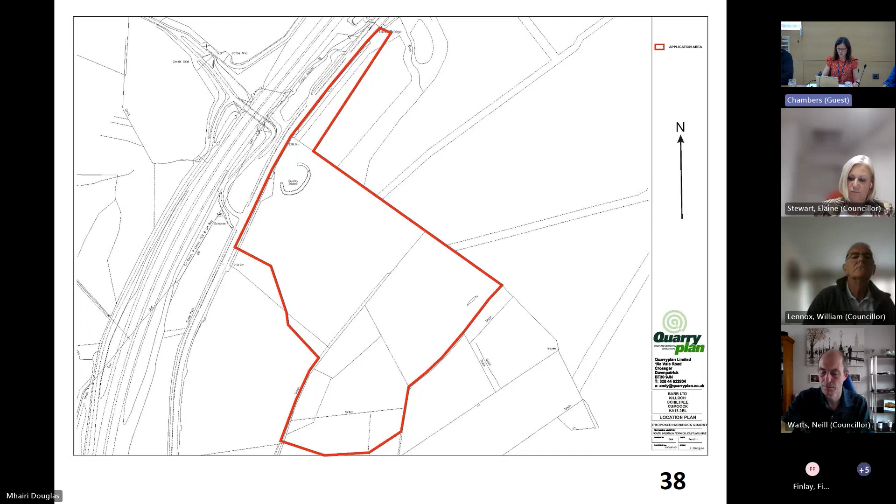This is the third phase, which is currently being worked at the moment. The final reserves of this phase are currently being worked, and they are being extracted from the southwestern corner of the site.

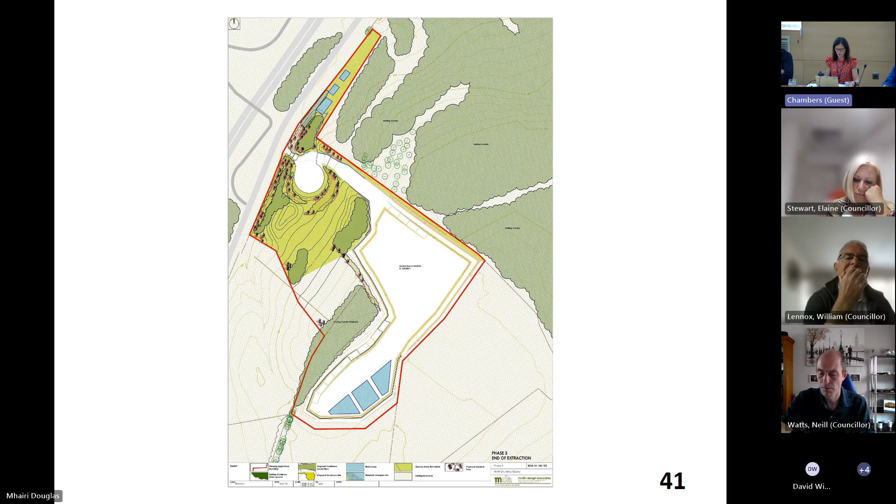So this application is to vary condition 1 primarily. That's the main change to it, is to vary condition 1 of the 2017 planning permission, and seeks to add a 4th phase to the approved phasing plan to extend the quarry to the south, to the northwest, and deepen the floor. This would result in the removal of a coniferous plantation.

In compensation for this, a new woodland would be planted adjacent to the extended extractive area, and this would also include deciduous planting. Overburden from the extension would be placed next to the existing area of overburden from the quarry.

As explained in the report, the mineral reserves are nearing exhaustion around 7 years into the 16-year consented lifetime of the quarry. The addition of phase 4 will allow for an estimated 4 to 5 years of production.

The report considers matters of amenity impacts, including noise, dust, lighting and vibration, along with impacts on biodiversity, ecology, private water supplies and landscape and visual effects.

It's important to note that only the proposed extension and deepening can be considered in those respects, and the impacts of the existing quarry cannot be revisited at this time. No unacceptable additional effects on the matters considered are predicted.

The reapplication of conditions relating to noise and dust will be sufficient mitigation for the extended quarry. With regard to vibration from blasting, condition 21 requires blasting to take place only between 10 AM and 6 PM Monday to Friday. Condition 22 requires blasting to be within acceptable levels at properties outwith the application site. The proposed condition 24 requires blasting to be restricted to no more than once every 2 weeks.

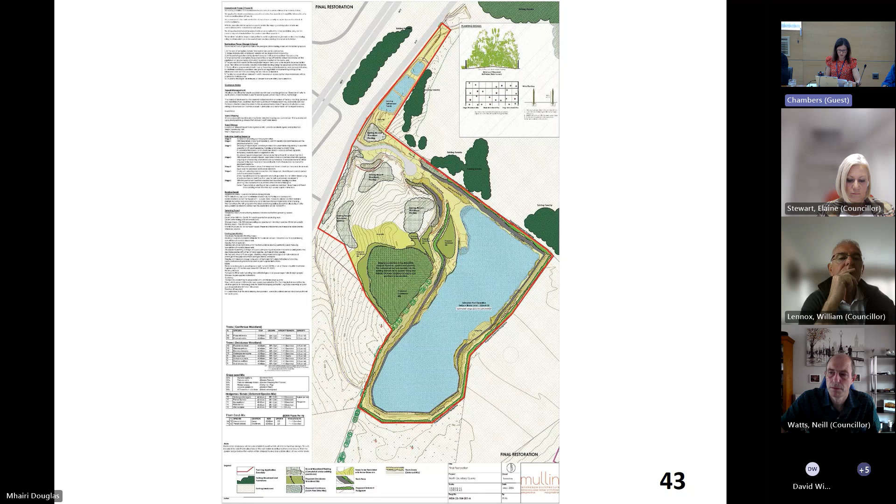The proposals include enhanced biodiversity and safety measures to prevent access to the water body, in the form of fencing and deterrent-type shrubs. Shallower margins are proposed around the edges to prevent sudden deep drop-offs if access is gained, particularly to the northern part of the water body.

The restoration bond has been reviewed and amended for the amended restoration proposals, and has been agreed as noted in the report at paragraph 38.

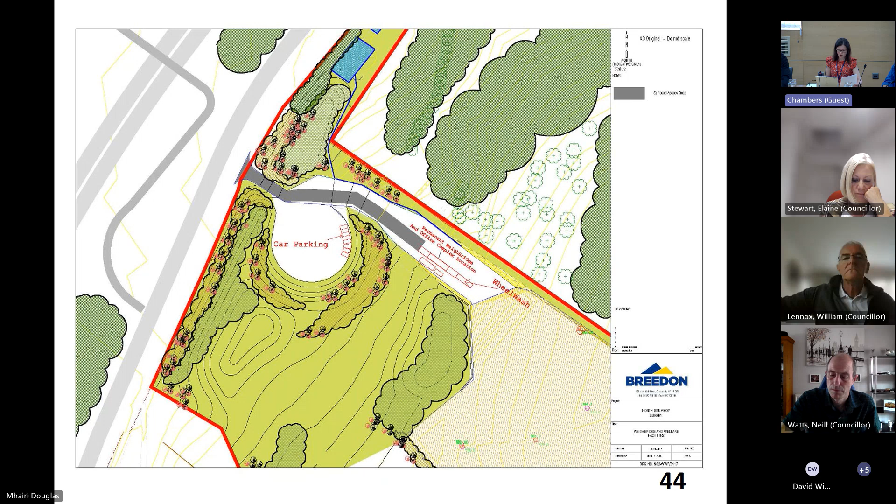This slide shows the existing car parking area along with the site cabins, wheel wash area and the weighbridge, which will all remain in place.

This is a useful aerial drone view looking roughly south. You can see the motorway and the A77 in the background. This was taken in March 2024 with the remaining mineral reserve visible to the south of the site, which has been further depleted since.

The extension would be into the area of conifers visible on the right-hand side of the quarry. You can also see the group of houses at North Drumboy and Marymead in the background—those are the closest dwelling houses.

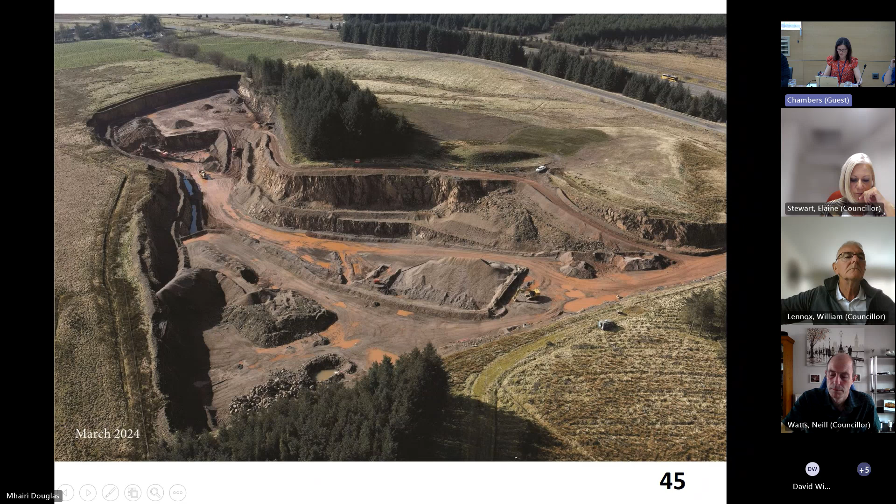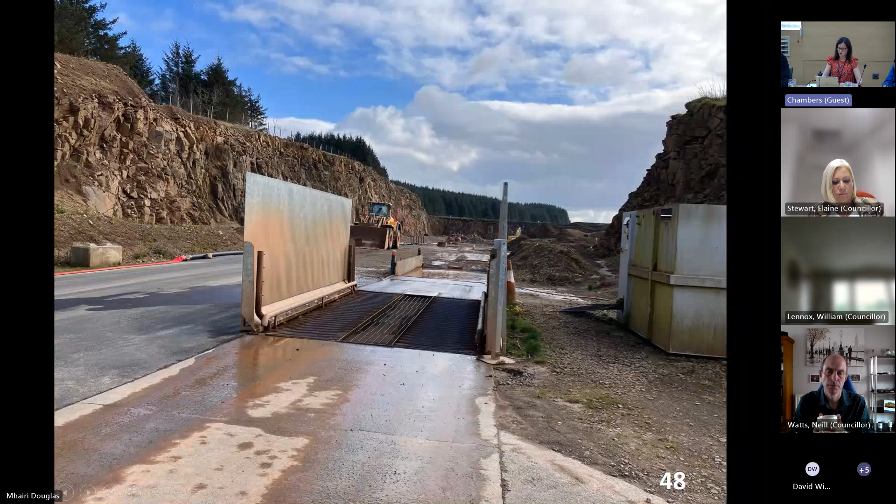This is the existing car parking area and access to the quarry, along with the wheel wash, the weighbridge, and site cabins.

This is looking into the final reserves to the south of the site and the area for the extension to the right-hand side where the conifers are.

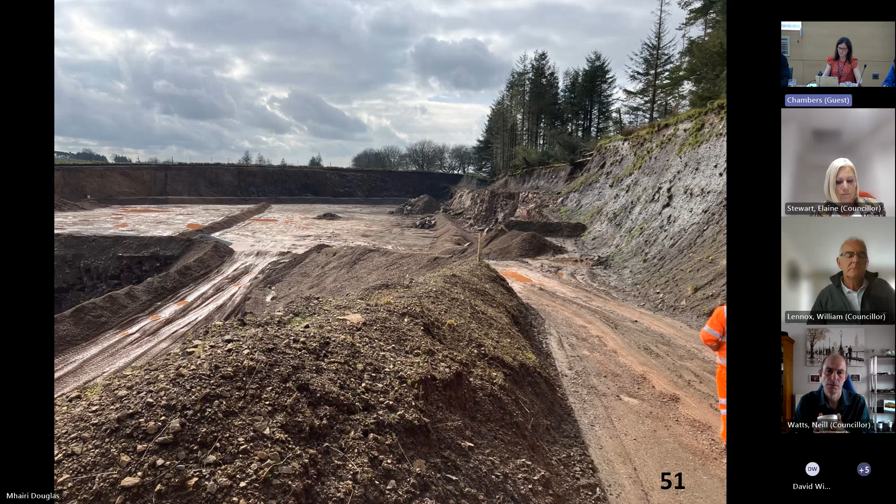Again, looking towards the extended area, which is the area of conifers that have been subject to a bit of wind blow.

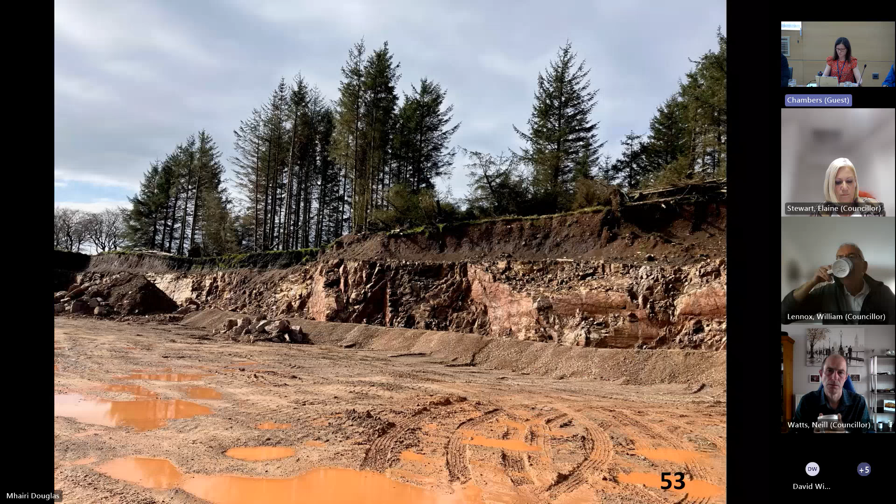Panning around more to the north, and looking from the other side into the extended area—the boundary of the extractive area would be roughly where the post and wire fence is.

Looking back in the other direction, and looking towards the area of overburden that's there at present, which has been planted.

To conclude, the application is recommended for approval, subject to the conditions attached and following the conclusion of a modified Section 75 obligation. Thank you.

Would you like to come forward again? Is that okay? Unless the mic's not working, innit? Oh, I'm sorry, the mics aren't working in the back row. I've just been informed we're having technical issues.

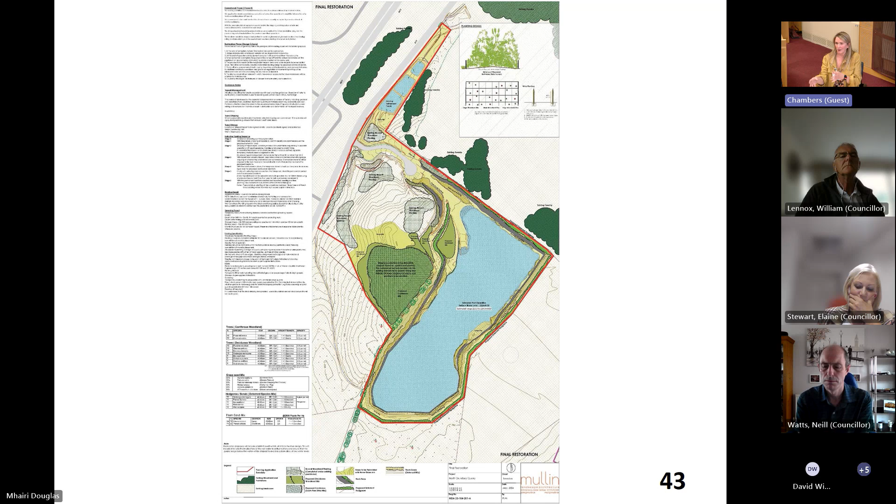Slightly, but it's not a case — we, the three families, and there are children as well in the house, at Norton, a family house that you didn't address. You didn't actually get any information about this planning application. It's not just a case of water. We need water for the toilet, for washing, for everything. It's not just a case of potting a couple of bottled waters. It would be quite an operation, as you'll agree, to provide three full houses with water, potentially for a few months, until a proper supply was established.

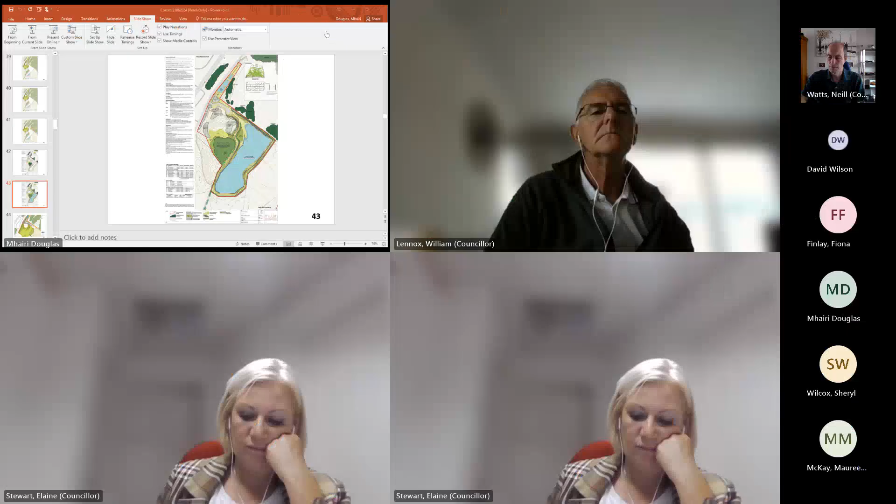So yes, I'm reassured in a way. You're talking about all these things, but again, that's your job to do that, to be reassuring. However, we were quite shocked when we noticed that our water level had dropped over the last 10 years, because that's the last time we had our well serviced. So it was a shock — that's the first time in 70 years of the well being there that there was a deficit in the water.

It's been addressed with the new pipe just now, but it is always a concern. So yes and no, I suppose. It's very interesting to hear it, but again, your job is to propose that for the applicant. So I'm still a bit concerned. And when I speak to the expert I spoke to, he said quite rightly so, you should be concerned, because in the past there has been other properties affected.

So not really, I'm sorry, I'm not. And I'm not really assured by all these lovely things about the vibrations. I can tell you, if I'm standing outside my house, when that goes off, it's bang, and the whole ground shakes. All your cutlery, everything shakes.

And I do appreciate they've got a job to do, but the initial planning, we thought that the three neighbours all thought it was going to be over within a certain time, and now this is so disappointing. It could potentially be more. So, again, it is the worry.

And we had a short disruption to water supply for a few days to get a pipe fixed. It was awful. You can't flush your toilet, you can't take a drink at the tap. It's so natural to go and turn the taps on, but you can't do that. It was actually an outflow pipe that was disrupted and upset the whole thing. Once that was fixed, great, you forget about it. But even a day or so without water is bad enough, and this would be a long time.

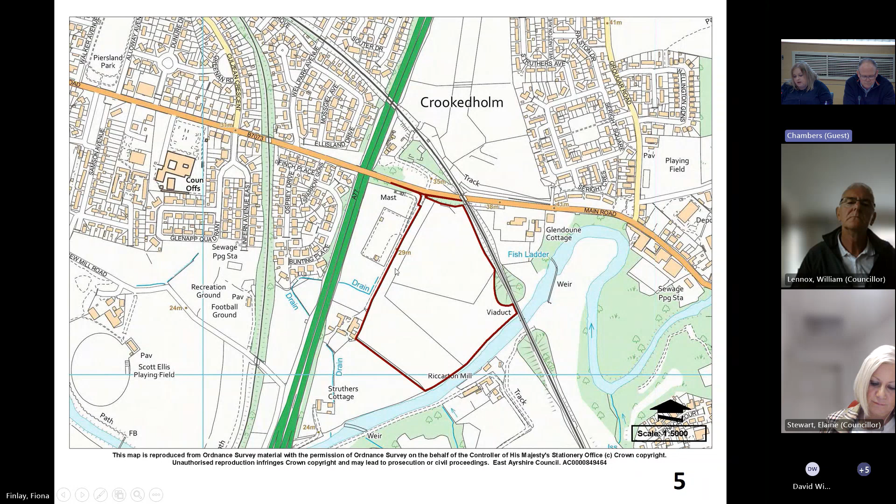If you can turn to your screens, members, I'll run through some slides, and Craig is going to run through some site photographs he took as case officer. The first slide shows the application site in relation to London Road, the B7073. You can see the council offices where we are just now, just along the road from the site. You can also see the railway line along the right-hand side of the site, and the A77, and the river along the southern part of the site with references to properties round about.

We now have the application site as detailed on the applicant's plans. We have London Road at the very top of the site, to the north. As you come in, there is the access lane that takes you down to the Struthers Kennels property, and there is an industrial yard to the left-hand side of the slide. At the very top, you'll see the access road that takes you into the application site, so the applicant is not intending to use the current access road. That takes you into a car park in the north area.

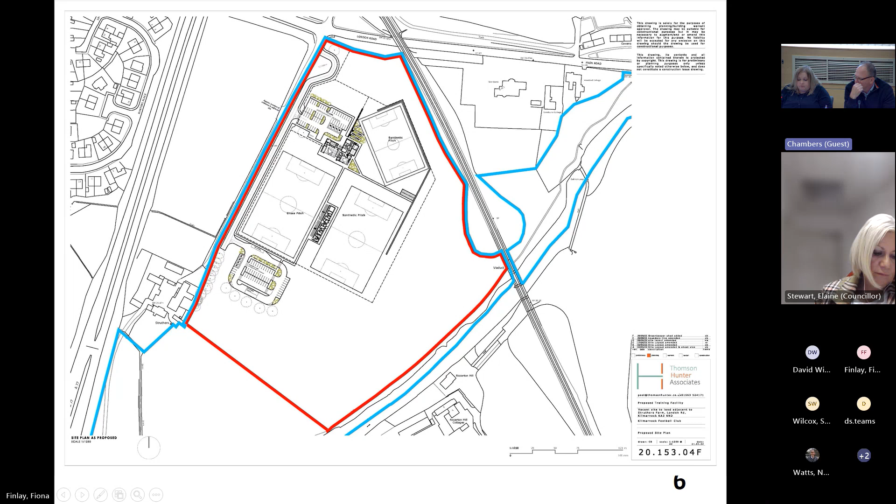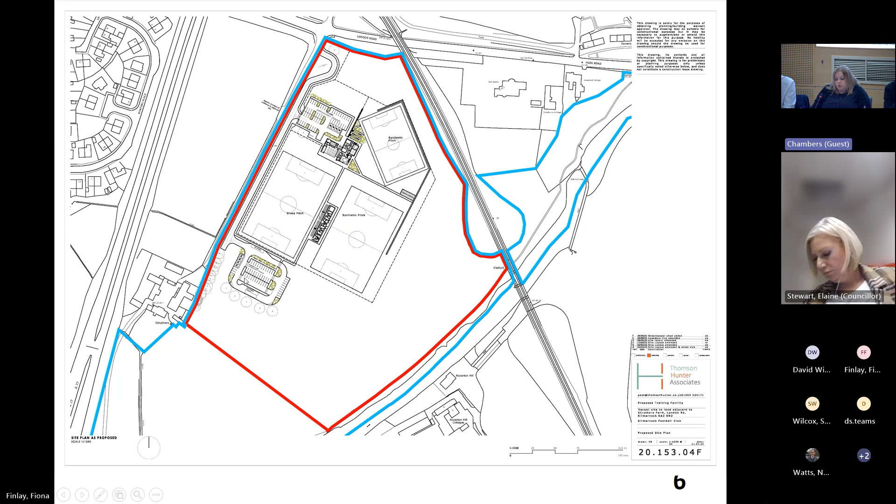To the right of that, we have a 9-a-side pitch. I'll show some visuals in a minute that give more context, but at the moment we have the 9-a-side pitch here. We have the training facility building with facilities inside such as changing facilities, canteen facilities, office facilities, meeting rooms and so on. We have the two full-size pitches down here with a stand in between, which focuses its attention onto this pitch. This little building is the greenkeeper shed, referenced in the report. Down to the southern part of the site, there is a further overflow car park also referred to in the report.

Just in a little bit more detail, members, you can see a bit closer in the car parking space at the north, the training facility building, the pitches, the stand and the southern car park there. These are just the architectural details. I do have some visual images which may give you better context in a minute or two, but these are just the plans that have come in for the training facility.

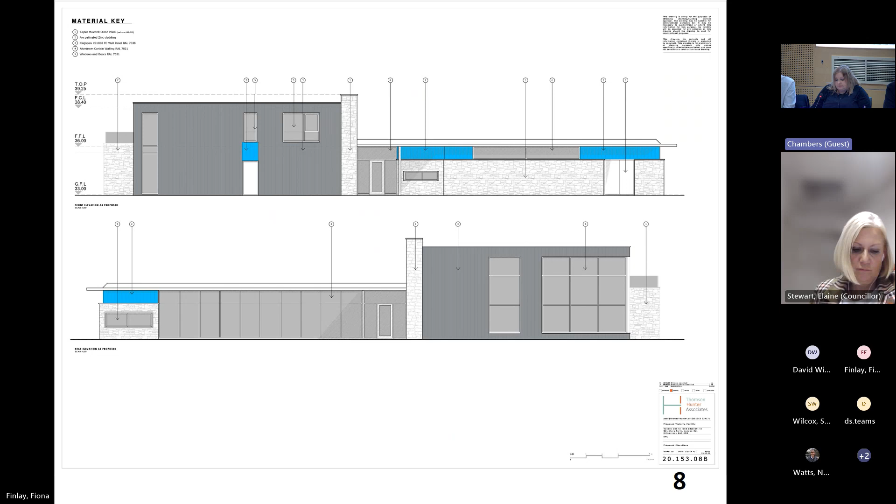These are the context visuals for you, members, so that you can see the design of the training facility itself. You'll see the use of stone, the use of zinc, use of clad. You'll see the windows and doors arrangement, etc. You'll see the car park over here, and that's about that, members, for you.

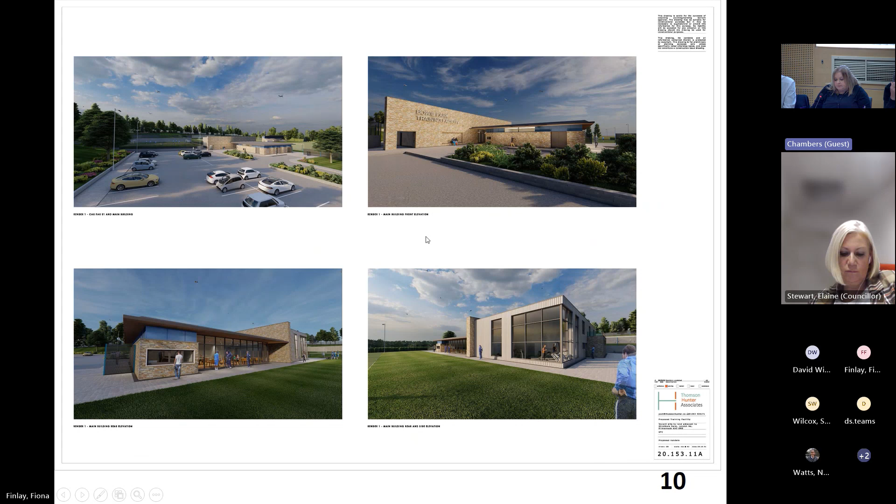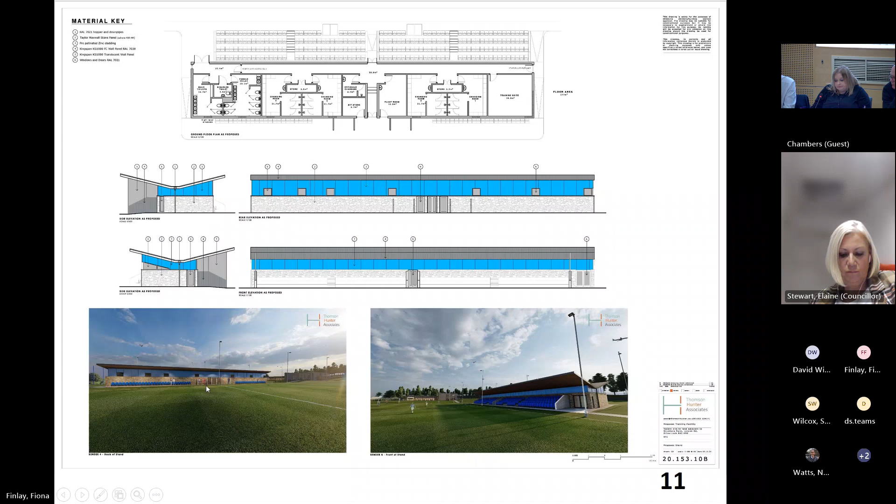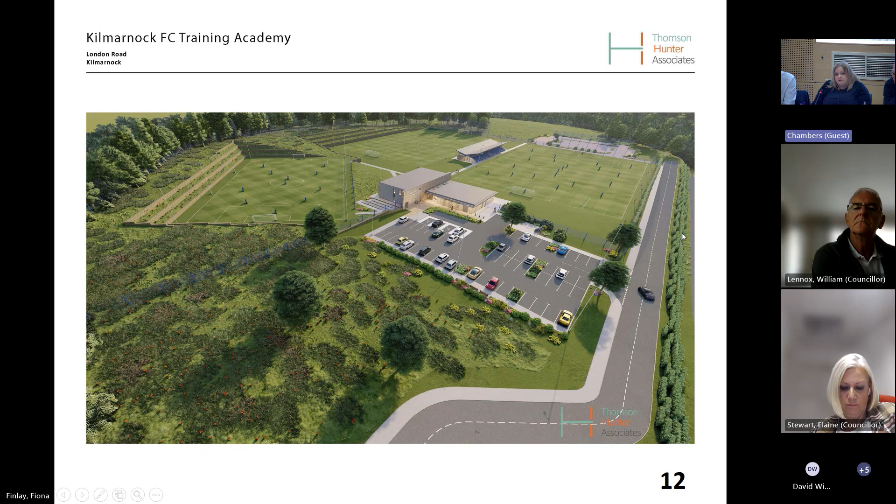This is just an image across the site, members, which we thought showed you quite good context. The site is sloping the further you get towards the boundary up here where my cursor is, hopefully you can see it's a bit staccato on the screen there. But you can see where the terracing is proposed to level out, and the extent of landscaping that's intended to be planted round about and within the site. You'll see the car park, the training facility, down towards the two full-size pitches, the southern car park, and that's the internal access lane. This is the existing lane just to the very right of the drawing, members, and you'll see the hedgerow that's already there that's intended to be retained and augmented if this application gets approval.

Last slide, I think, from me before Craig introduces the photographs for you. Just to clarify and confirm, members, this is the local development plan. Apologies, it's a bit of a blurry plan, I didn't realise it was going to come up quite so blurry on screen. But you can see the site in here. It is just outwith the Kilmarnock settlement boundary identified by that black line, in the local development plan 2. But it's just to clarify that position for you, members.

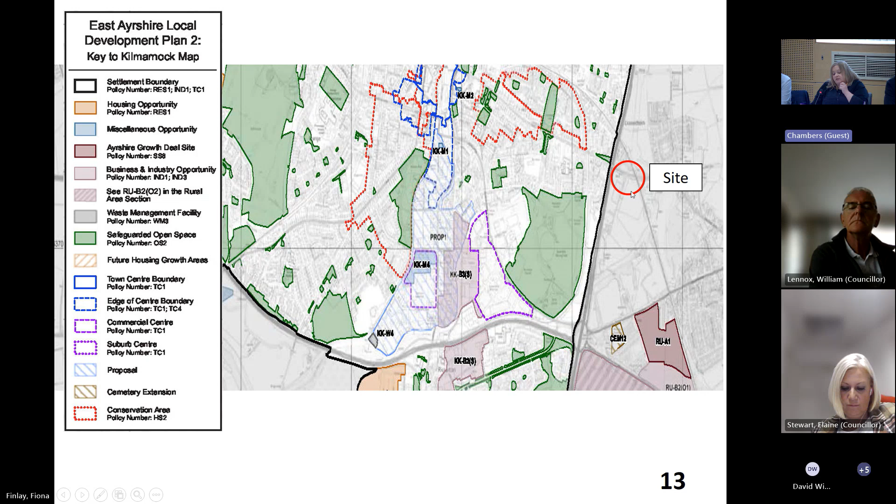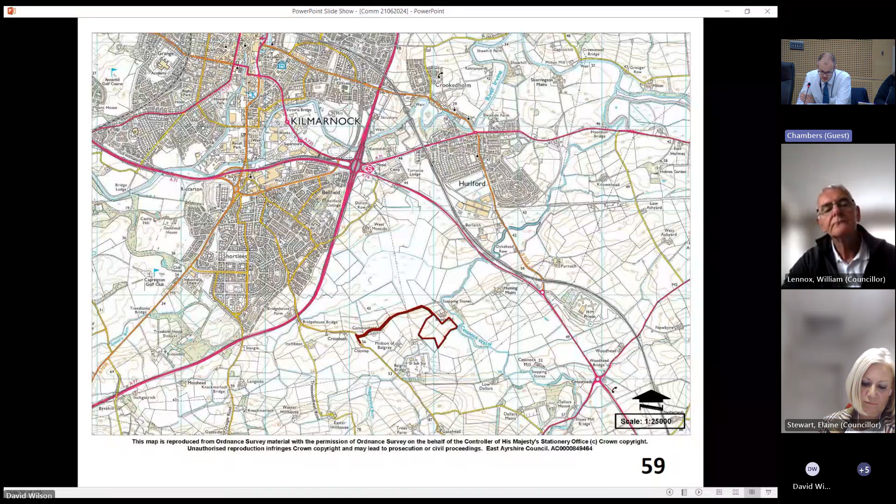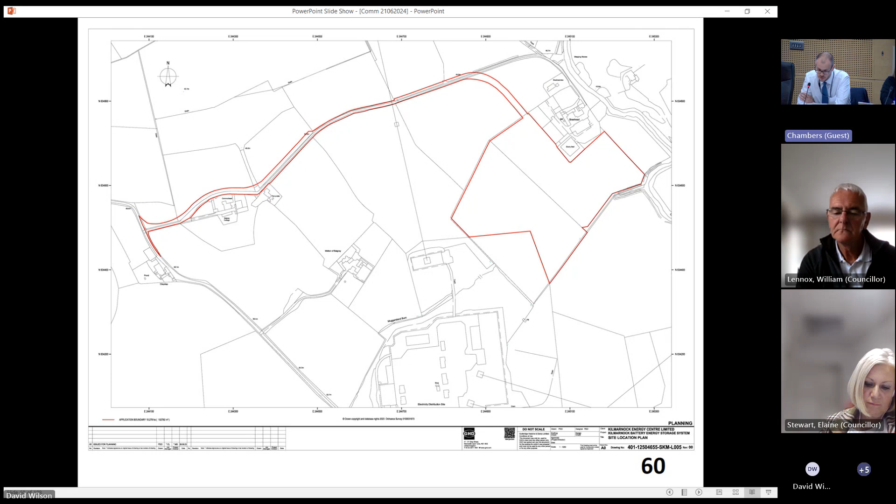This slide shows the site location and context, with Kilmarnock to the north and northwest, approximately 2 kilometres away, and the site access linking onto the C53 public road. The location plan shows Brayhead Farm immediately north of the main part of the site, with the access road coming off the C53 along the existing access before turning towards the application site, through an area of field in the top right hand corner of the slide.

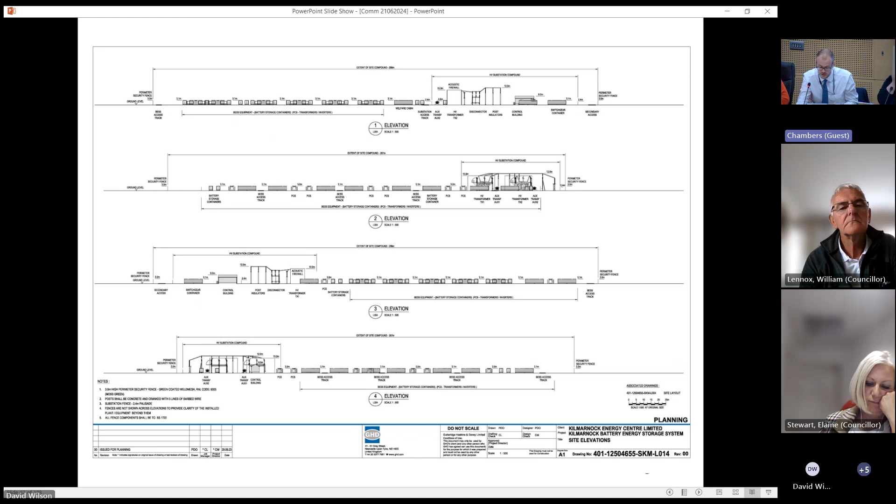The slide shows the elevations of the development, showing the various site infrastructure. This doesn't take account of site levels, which I'll come on to, but essentially shows the various components, predominantly the battery energy storage cells, which are containerised units, with some electrical infrastructure up to 12 metres high, and a retaining noise baffling and containment wall around certain parts of the infrastructure, which would be 10 metres high on the southeastern part of the site.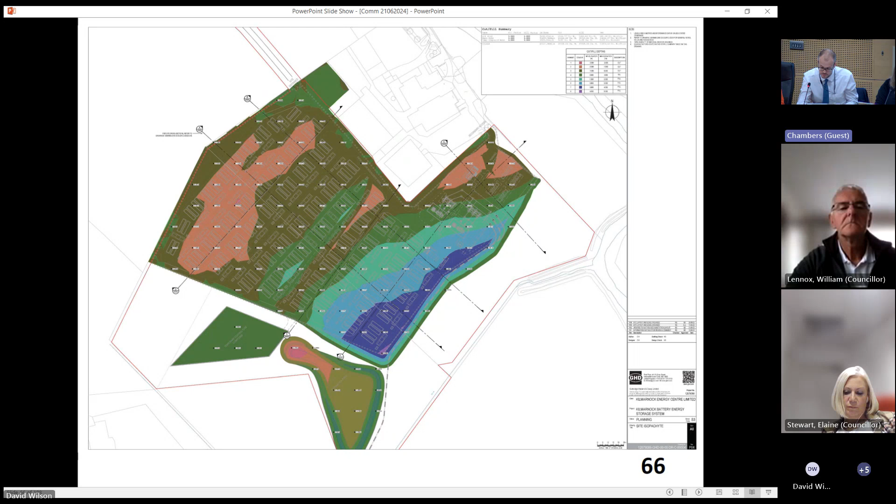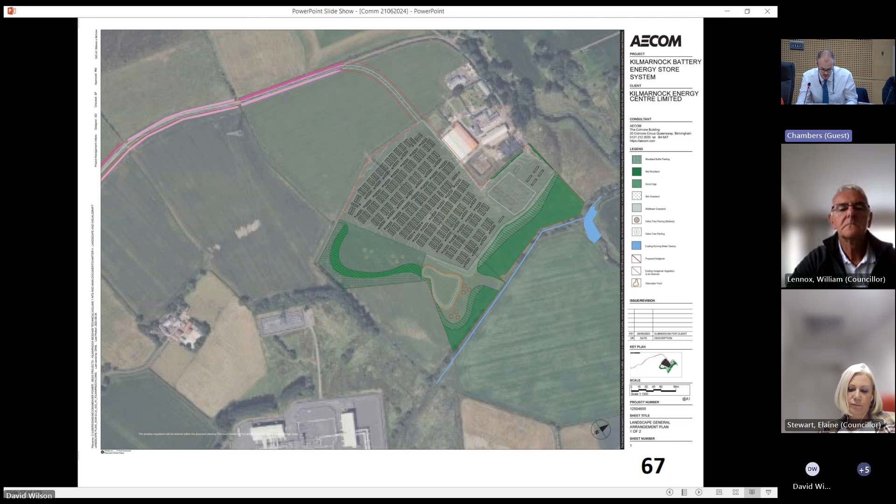This slide shows the commitment to plant new hedgerow along the site access track where some existing hedging requires to be removed for road access widening. The dark pink represents new hedging, with retained hedging shown in light pink.

You can see in the area in the top right just where the existing track is left to access the site, and that's a new track that will be formed through an agricultural field.

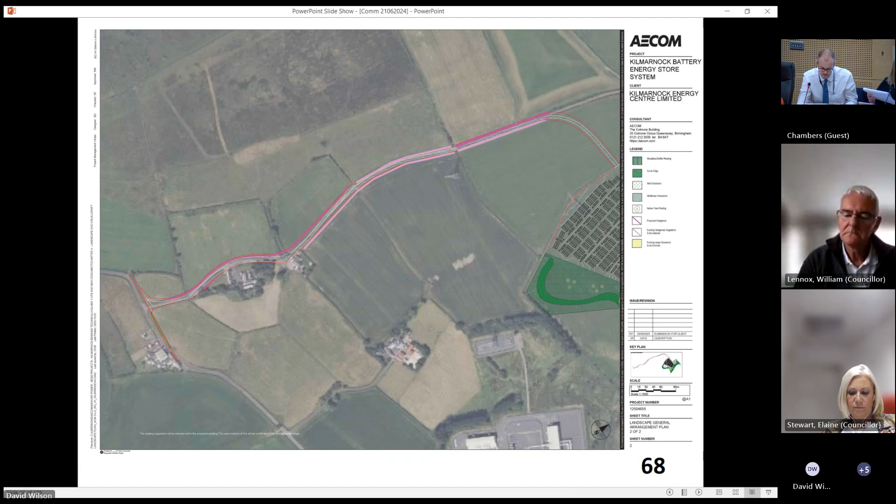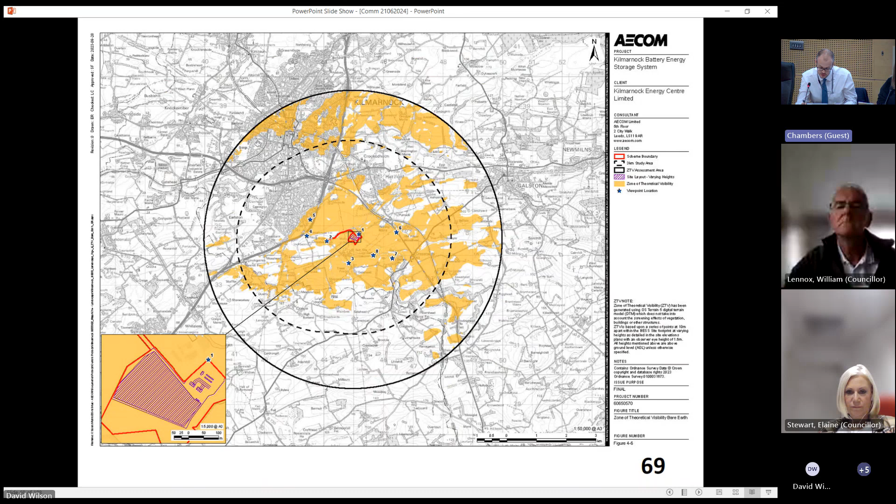This is a view from the corner of the Brayhead farmyard on the very edge of the development itself, which is in the dogleg section of the development site, showing the bays in that view, which is inevitable, right adjacent to the edge of the site. These are the highest structures proposed as part of the development, between 10 and 12 metres high here.

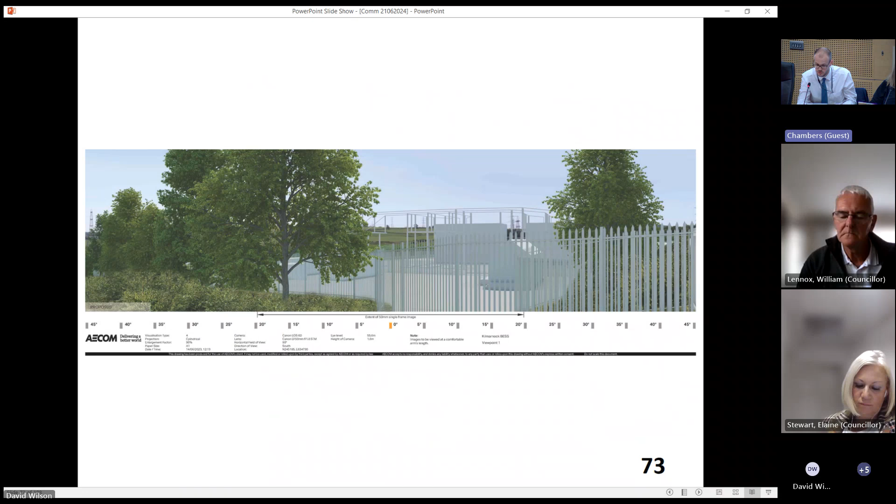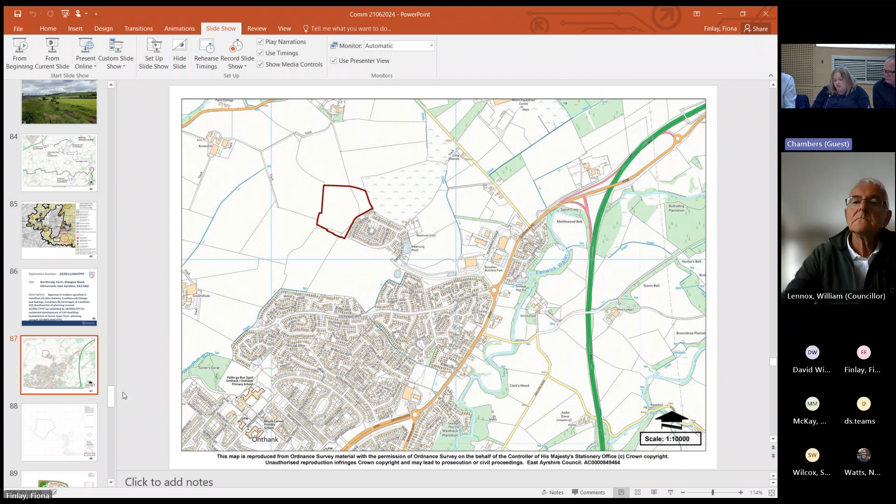So it's this phase in here, members. We have given consent to the overall phasing in Northcraig. These phases are built out here, and this phase is the current phase where Wimpey wish to come in and build their product. So this plan doesn't really show you anything, members, but just shows you the red line site in relation to what's on the OS setting for at the moment.

This is the housing layout. It is very similar to what was consented for Barratt Homes. We have access here into the site, a frontage, and the site leading us round. We did have some changes to the proposed layout, and I'll be able to explain those to you in a second, but you can see that the layout is very similar to the Barratt product.

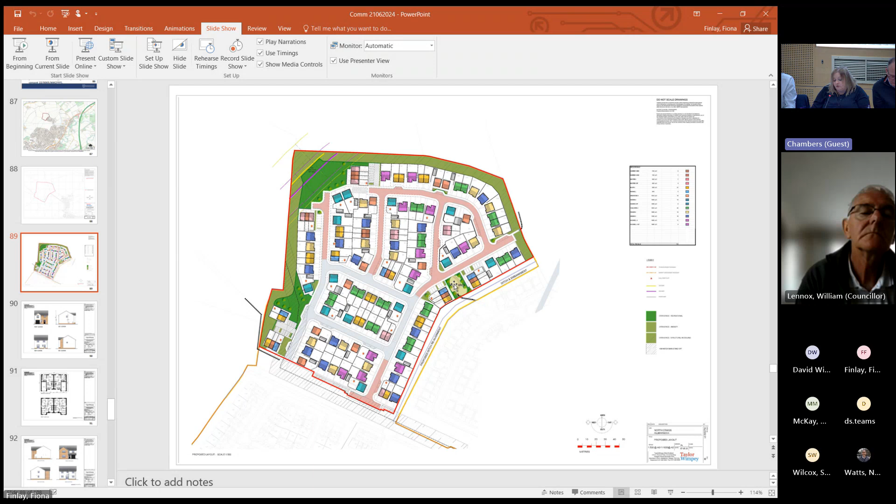The layout shows landscaping up here. We have the standoff distance up here for the water main. We have gone through discussions with gas networks and we're happy with it. We have the play area in here, and there is footpath connectivity to the earlier phase, which is already built out in here.

A couple of house type plans for you, members, just to show you what Wimpey are proposing. We have a mix of detached, semi-detached and terrace properties.

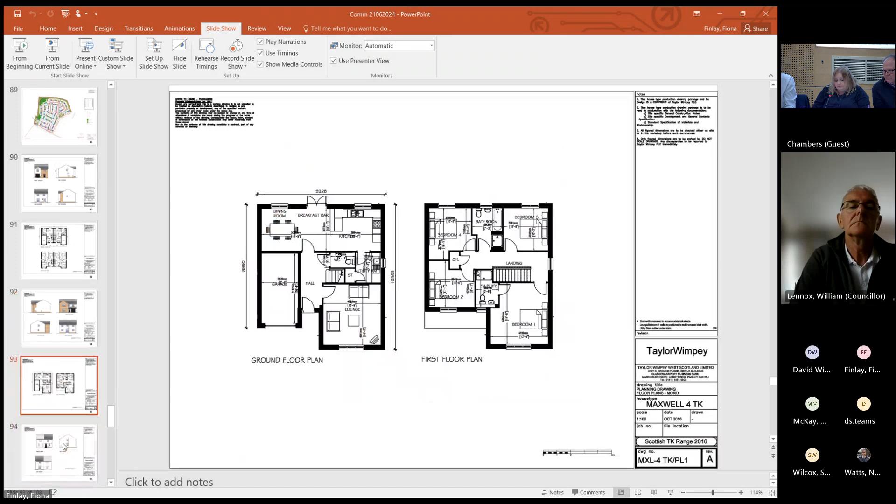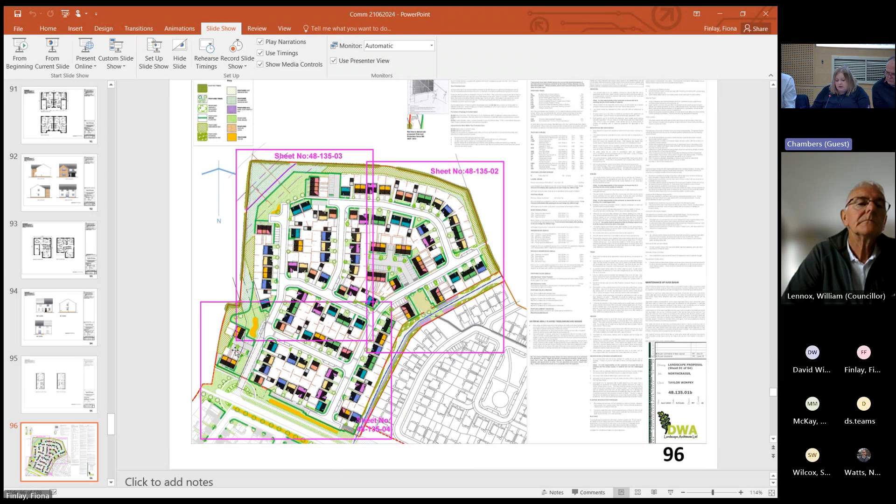So we have no issues raised through the consultation process that would warrant refusal, and we've received no letters of objection. Obviously, as we've discussed previously, the Planning Scotland Act requires that we make decisions in accordance with the development plan unless material considerations indicate otherwise, and the development plan currently comprises the newly adopted local development plan for 24 and NPF4. The proposal seeks to effectively remix the housing product that's offered on site.

The road layout will remain as previously approved under the earlier application granted to Barratt Homes, and there's minor alterations to accommodate the new housing types.

The houses proposed are of a suitable size and scale for the site and surrounding area. They'll be sited and orientated in a manner that will preserve the amenity of existing and proposed residents in the North Craigs residential area. And there's a variation in materials, design and finishes to create interest within the estate, contributing towards a sense of place and identity.